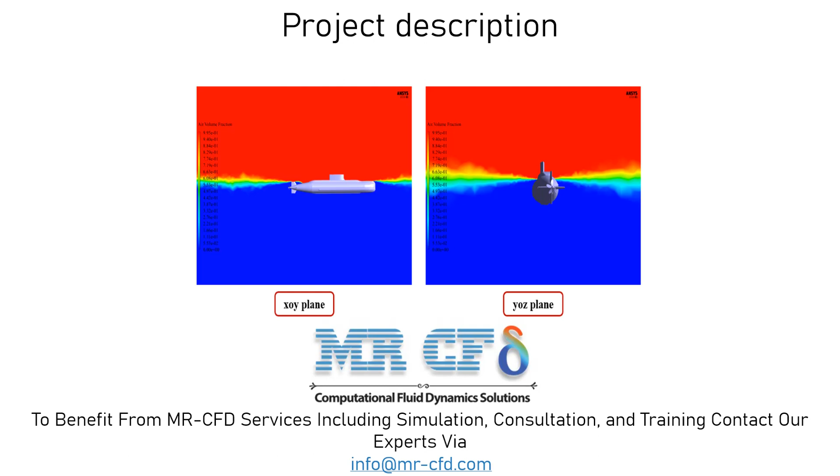In such models, the location of the cells in the grid changes due to the displacement of their adjacent boundaries over time, and therefore, to define the instantaneous grid shift, we benefit from the dynamic mesh model. Also, it should be pointed out that the VOF multiphase flow model is used to simulate two phases of air and water.

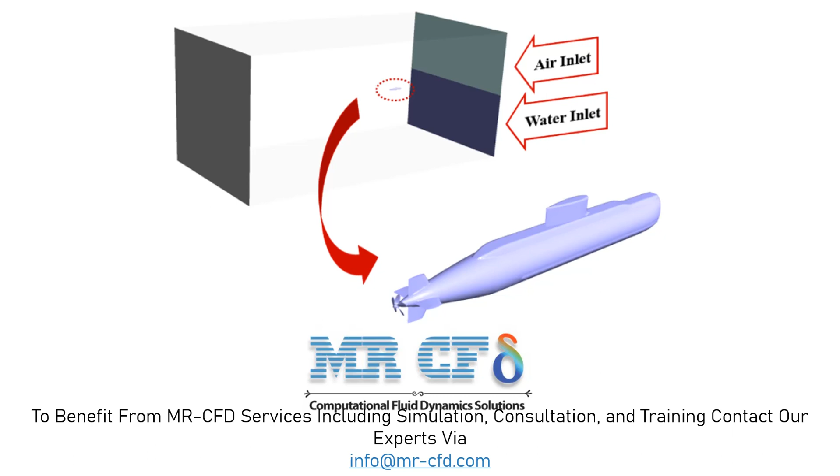The present model is designed in 3 dimensions using AutoCAD, CATIA, and ICEM softwares. The horizontal length of the submarine is 16.25 meters, and at the end of it there is a number of impellers with a diameter of 0.825 meters. Around the submarine, a cylindrical computational area is designed inside a cubic area, the set of which is placed inside a very large cube as a total computational domain.

The meshing of the present model has been done using ICEM software. The mesh type is hybrid, meaning that a combination of a structured and unstructured mesh is used. Thus, meshing in areas close to the submarine hull is unstructured, and in general areas of the model is structured. Also, the element number is equal to 2,802,219.

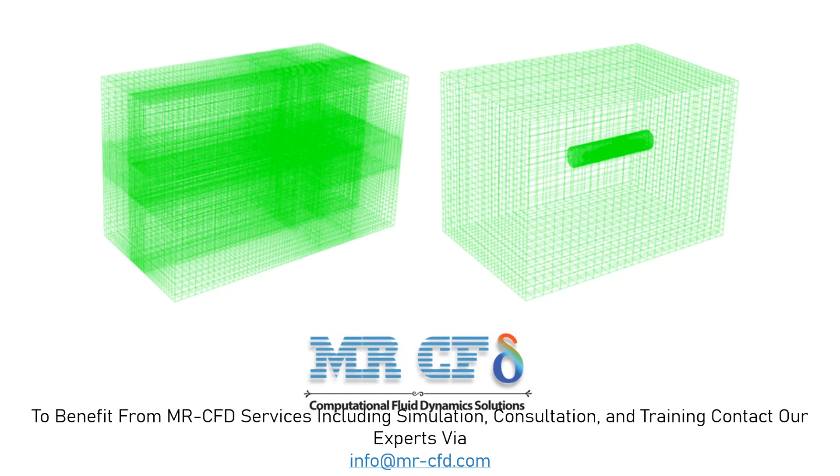Under the General Setup tab, you can see different buttons from scales to units. By clicking on scale, a new window will appear showing you the domain extents of your geometry. Also, under the view length unit section, you can see the default geometry units, which is meter in this project. Also, under the scaling section, under mesh was created in, you can change the settings in order to activate the scaling factors beneath that.

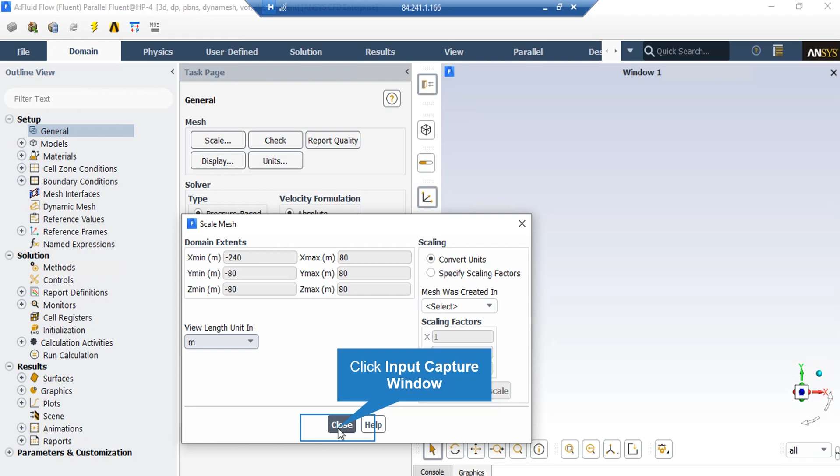For example, your geometry and mesh was designed in a software whose default unit was millimeters. By activating these scaling factors, you can change this factor to your desired factors in order to set the length to the appropriate unit. By clicking on the check button, you will see that under the console tab, the Fluent software will start to check your mesh for any errors.

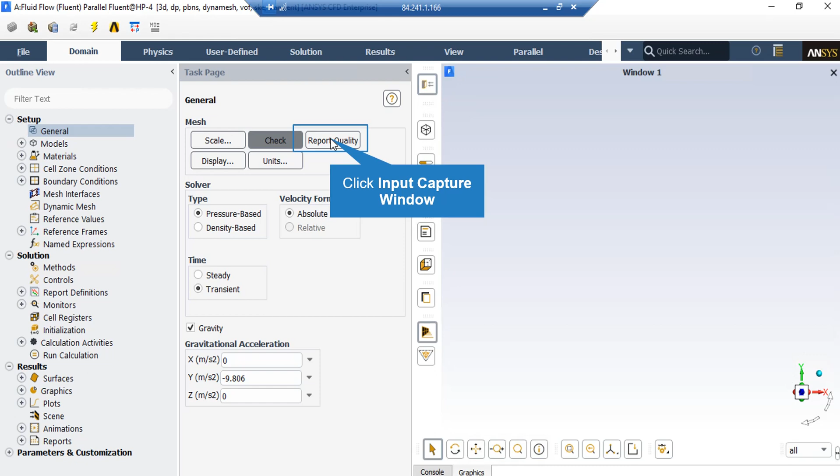Also, by clicking on report quality, again in the console tab, the Fluent software will give you the quality report for your mesh. For example, you can see the maximum aspect ratio of your mesh, minimum orthogonal quality, etc. By clicking on the display button, a new window will appear in which you can see different parts of your geometry. In the window, which shows you the names of the different parts of your geometry, you can select each part and then click on display so that the software will show you that part.

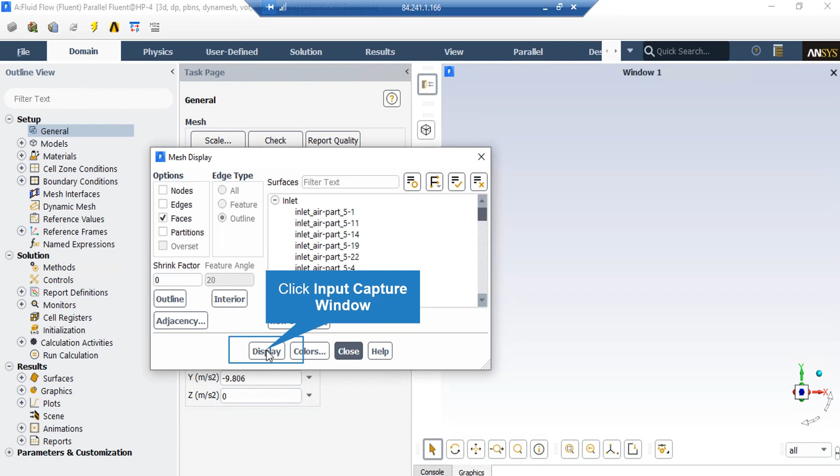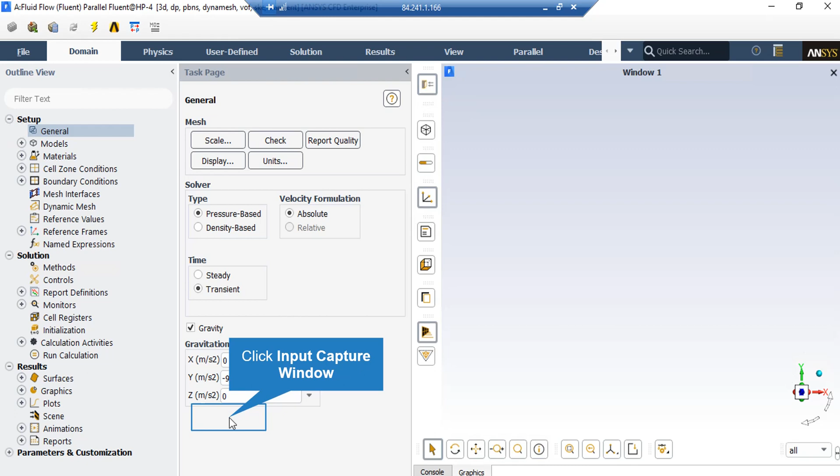Now there are several assumptions taken into account for this project. First, the type of our solver is defined to be pressure based since we are dealing with incompressible flows. Also, the velocity formulation is taken to be in absolute form. And as for the time study, we have selected the transient time study since we are dealing with a time progressing phenomenon. Also, in order to model the buoyancy forces, we have enabled gravity, and its value is equal to minus 9.81 in the y direction.

Now under the model section, if you double click on the multiphase button, in the window you can see that the volume of fluid model is enabled in order to simulate the two phases of air and water. Also under the volume fraction parameter section, you can see that the implicit formulation is selected. Also, as explained about the body forces, we have enabled the implicit body force. As explained in the project description section, we have enabled the open channel flow, and under the number of Eulerian phases, you can see that two phases of air and water are set to be defined and simulated.

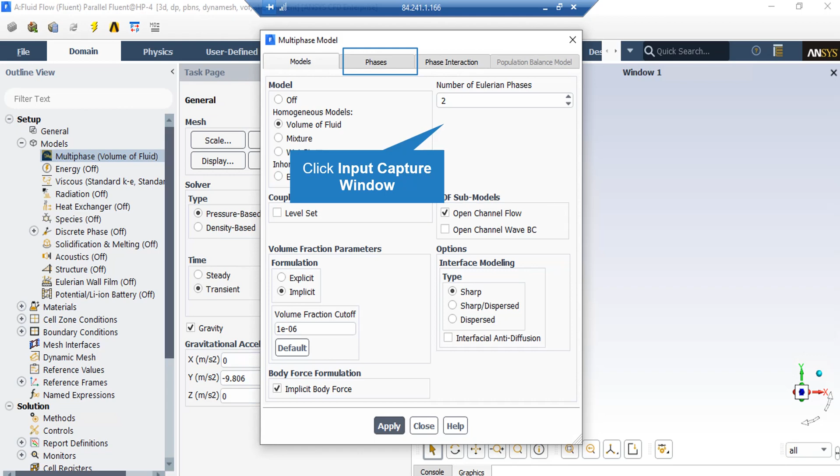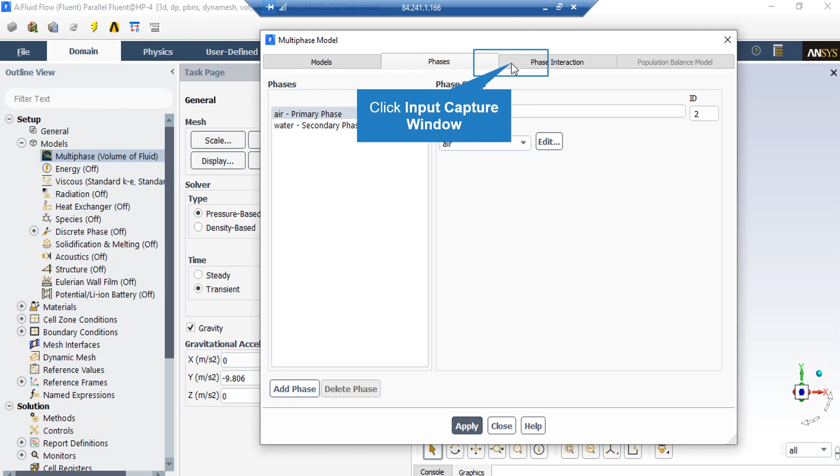If you click on the phases tab, you can see that air and water are defined as primary and secondary phases. In order to add a new phase, you just have to click on the add phase button. But you should be aware that before adding a new phase here, you should add that material in the material section, which will be explained in next slides. Also, click on the phase interaction tab. You can see that the surface tension force modeling between the two phases of air and water is enabled, and the value for the surface tension coefficient between these two phases is set to be equal to 0.072.

After double-clicking on the viscous button, a new window will appear. In the window, you will see that we have chosen the two-equation standard K epsilon model to solve for our fluid flow. The standard K epsilon model is one of the most renowned models for solving turbulent fluid flows, and the two-equation K epsilon model allows the determination of both a turbulent length scale and time scale by solving two separate transport equations.

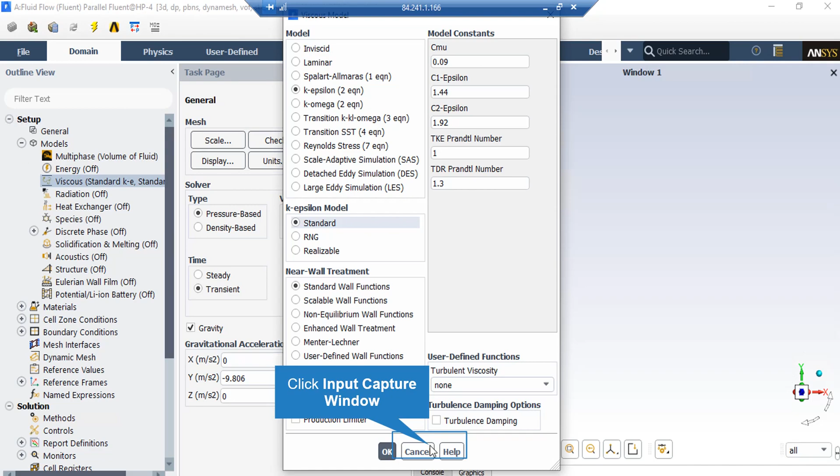If you expand the fluid under the material section, you can see that two materials of air and water are defined here as our two main phases. Also, in order to add a new material, all you have to do is to right-click on fluid and then select new. In the appeared window, you either can define a new material by defining its properties yourself, or you can simply click on Fluent Database and add a new material from the available list of materials from the Fluent software.

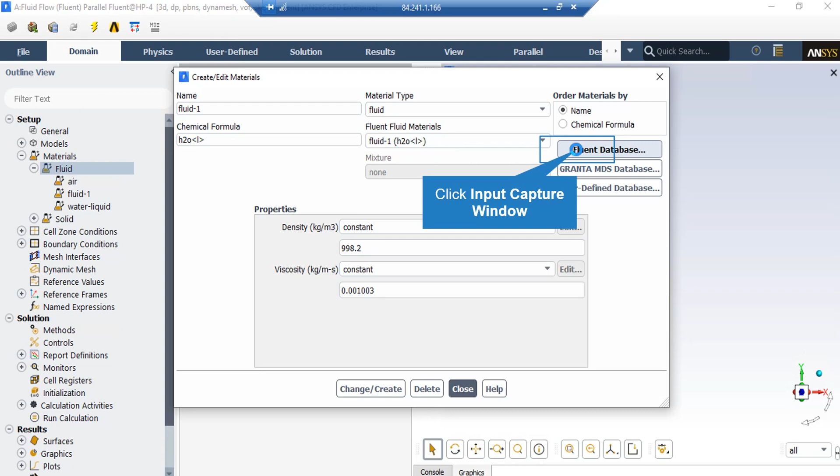Now, in order to correctly model the buoyancy forces applied on the geometry, we need to define the reference pressure location for the software. To do that, we double click on Cell Zone Conditions and we click on the Operating Conditions button.

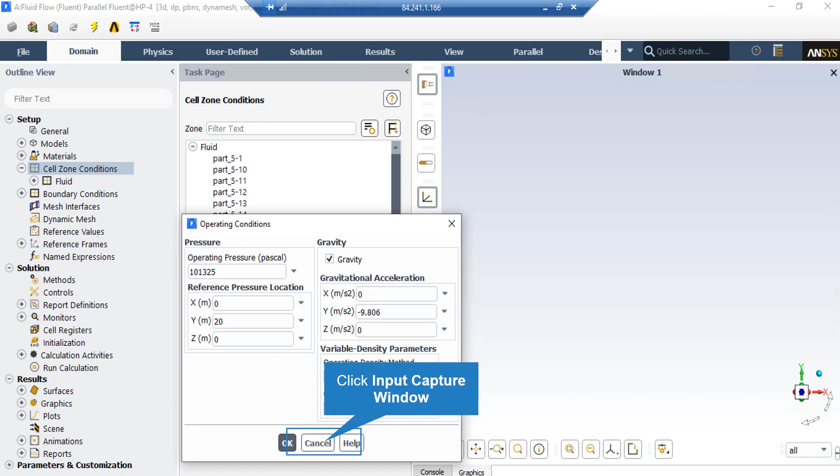Now, if we click on each of these air inlet boundaries, you can see that the type of these boundaries is defined to be velocity inlet. By clicking on the Edit button, a new window will appear in which you can change the settings for these boundaries. In the appeared window, in front of the velocity magnitude section, you have to enter the value of 1.62 meters per second. And under the phase section, if you change from mixture to water, you can see the water volume fraction is set to be 0, which means that only airflow enters this boundary.

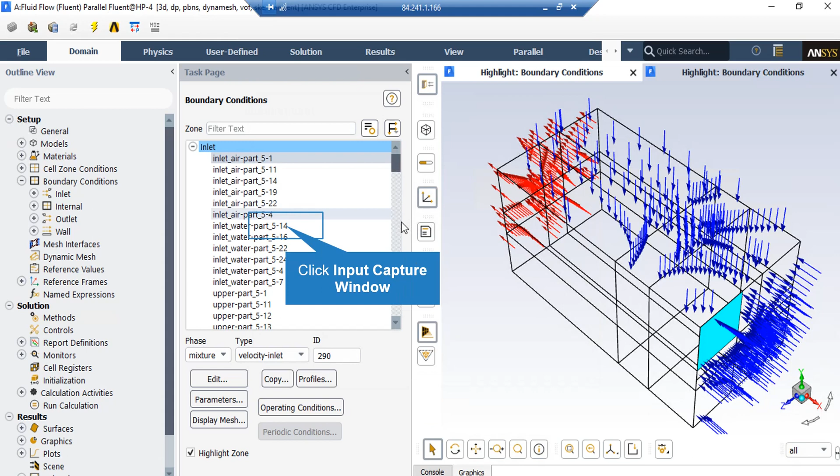And just like the previous boundary, if you click on each of these inlet water boundaries, you can see that again the type of these boundaries is defined to be velocity inlet. By clicking on the Edit button, again you can change the settings for these boundaries. In the appeared window, you can see the same settings as for the air inlet boundary, with the difference that if you click on the phase section and change it from mixture to water, you can see that the water volume fraction is set to be equal to 1, meaning that only water will enter these boundaries.

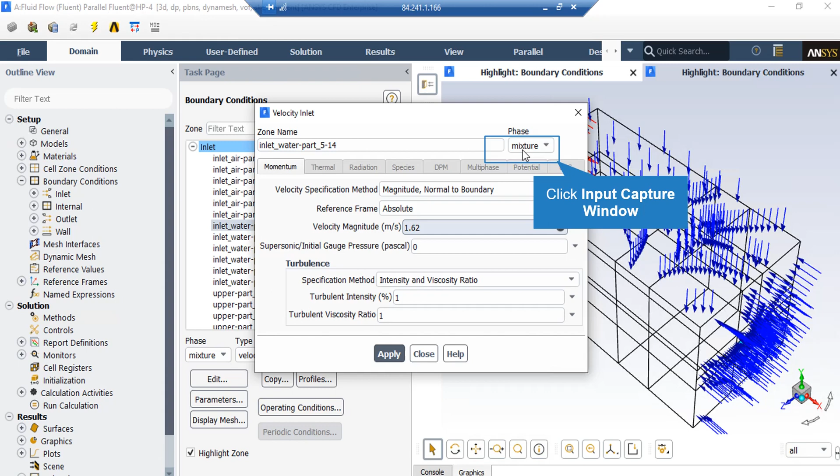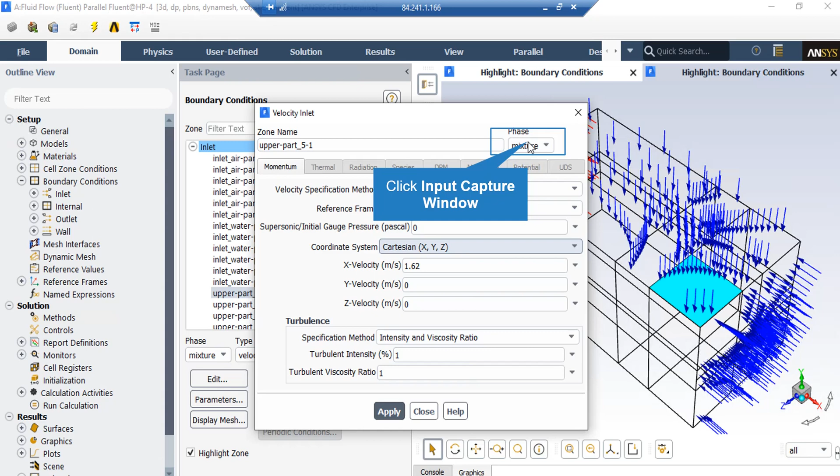And if you click on the upper part boundaries, you can see that under the Momentum tab in the appeared window, in front of the coordinate system, we have selected the Cartesian coordinate, and in front of the X velocity section, we have entered the value of 1.62. Again, if you select the phase section and click on water phase, you can see that the value of water volume fraction over these boundaries is equal to 0, meaning that only air can enter these boundaries.

Now, if you click on the outlet boundaries, you can see that the face related to this boundary is divided into three sections. The upper section is related to the air outlet, and the middle and the lower sections are related to the mixture of air and water outlet. If you click on the outlet boundaries related to the airflow, you can see that under the Momentum tab, the gauge pressure value is set to 0.

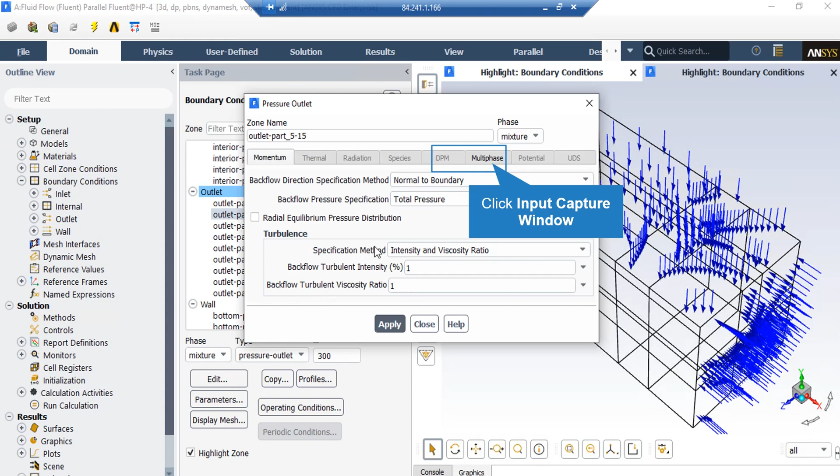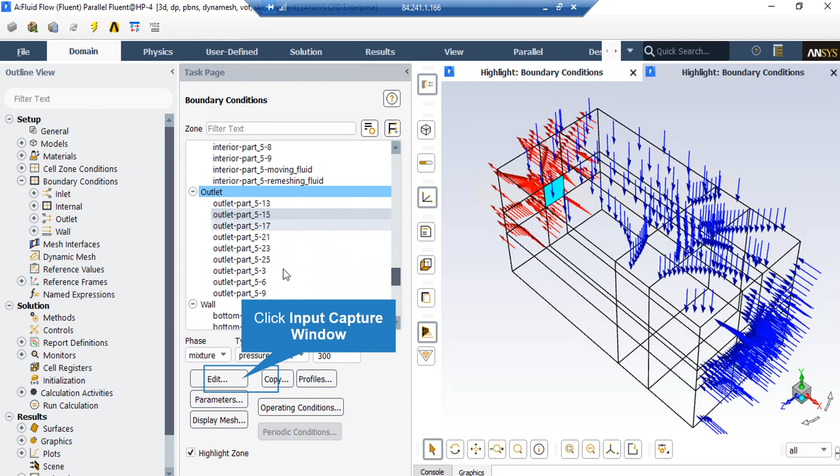Now, if you click on the boundaries which are placed in the middle section and lower section of this face, in the appeared window, if you click on the multiphase tab, you can see that the open channel option is enabled, and free surface level value and bottom level value are entered, as you can see in this slide. The same setting is also applied for the outlet boundary which is placed in the lower section of our outlet face.

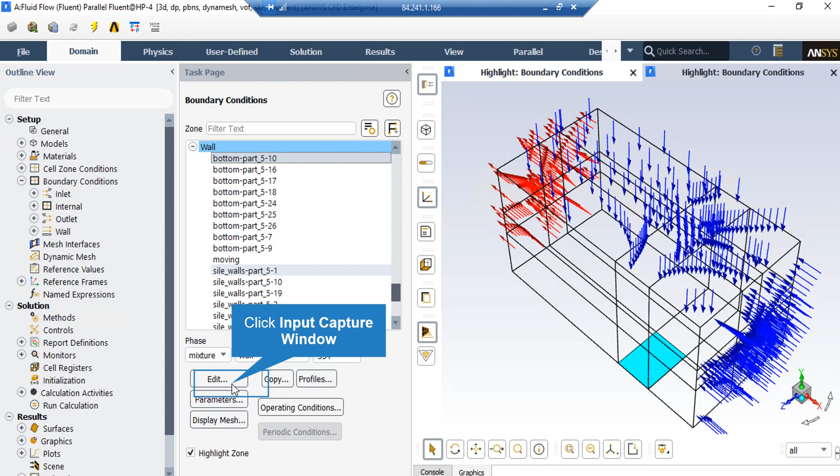And if you click on each of the wall boundaries and then click on the edit button, in the appeared window you can see that the stationary wall motion along with no slip shear condition are defined for these walls.

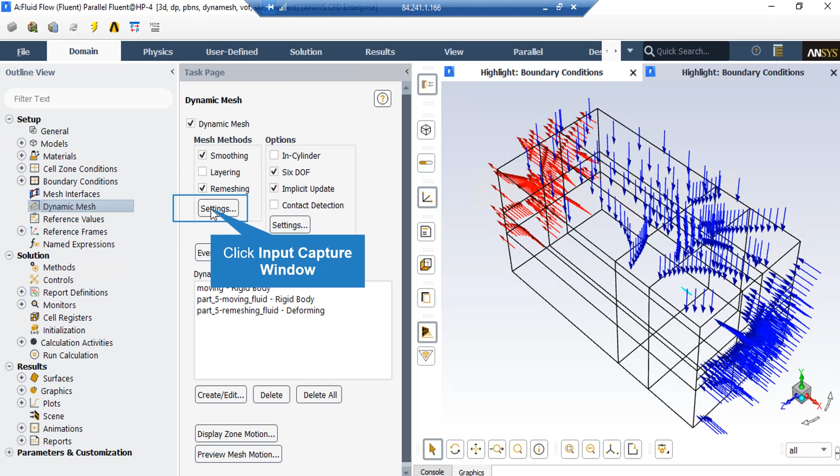Now if you double click on the dynamic mesh button, in the appeared part you can see we have enabled the dynamic mesh option, and under the mesh method we have enabled two options of smoothing and remeshing. By clicking on the settings button, we further adjust these two options. In the appeared window under the method, you can see we have enabled the spring Laplace boundary layer. The spring method is a method in which the mesh cells act just like a spring when they are pushed or pulled by the moving object. Also in this window you can see the specifications for this method.

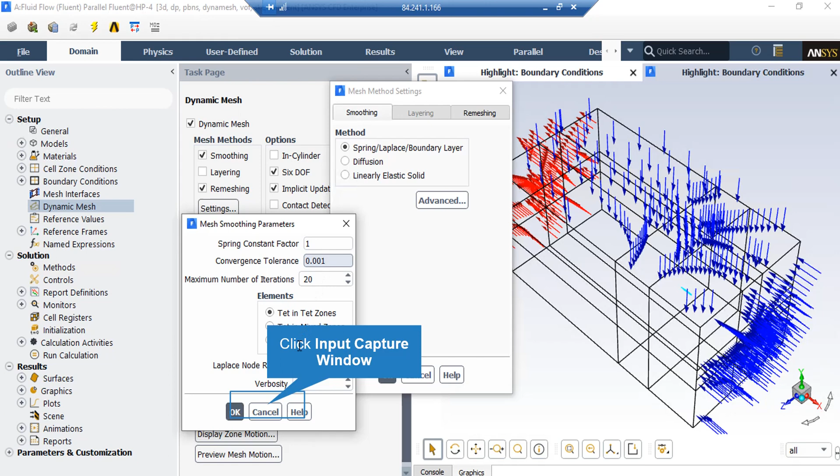Also, if you click on the remeshing tab, you can see that the local cell option is selected, and under the parameters you can see the values which indicate when the remeshing occurs. Setting these values will be explained in the next slide in detail. Under the options, you can see 6DOF and implicit update are enabled. By clicking on the settings button, we can further change and adjust the settings related to these options.

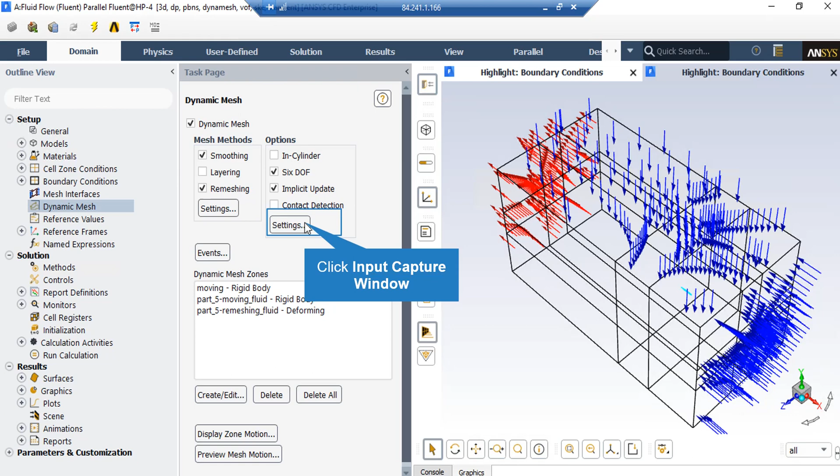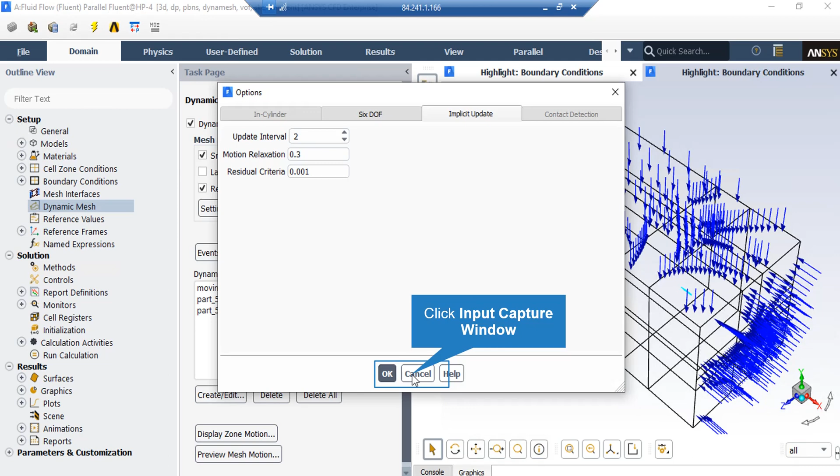In the appeared window under the 6DOF, you can see we have enabled the write motion history, and underneath it you can enter the address where you want to save this file, which gives you the location and the changes in angle of the floating object in terms of time. In this project, since we are calculating the forces that are exerted on the floating object, in order to avoid divergence and in order to map the values of the forces on the new mesh after each remeshing interval, we have enabled the implicit update, and you can see the values for these settings in this window. Now, in order to set the settings for dynamic mesh for different zones, we click on the create or edit button.

In the appeared window, if you click on the moving mesh zone, you can see that the type of this zone is defined as rigid body. Also under the motion attributes tab, you can see that under the 6DOF UDF or properties, a UDF is defined, and under the 6DOF section you can see we have enabled this option. Also under the center of gravity location, we have calculated the center of gravity of our submarine using the SolidWorks

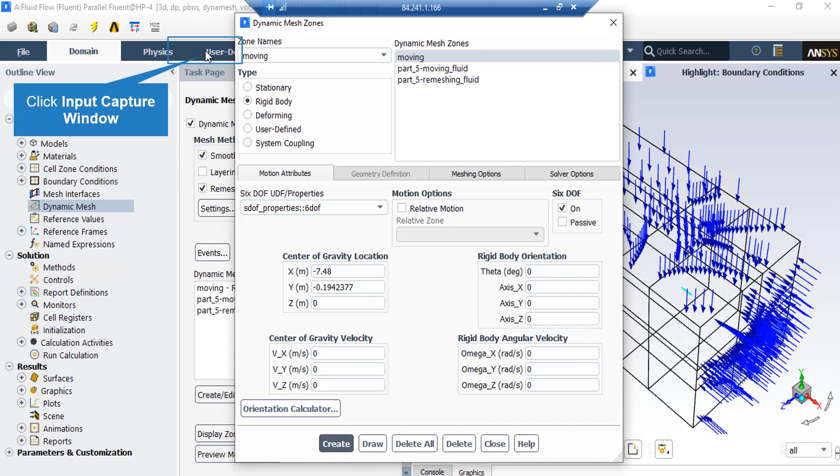software. Now in order to introduce and compile the UDF for the software, all you have to do is to click on the user defined tab and then go over functions and select compiled. After clicking on the compile button, in the appeared window, by clicking on the add button, you can select the UDF file which will be given to you with the rest of the files, and then by clicking on build and then load, this UDF will be loaded for the software.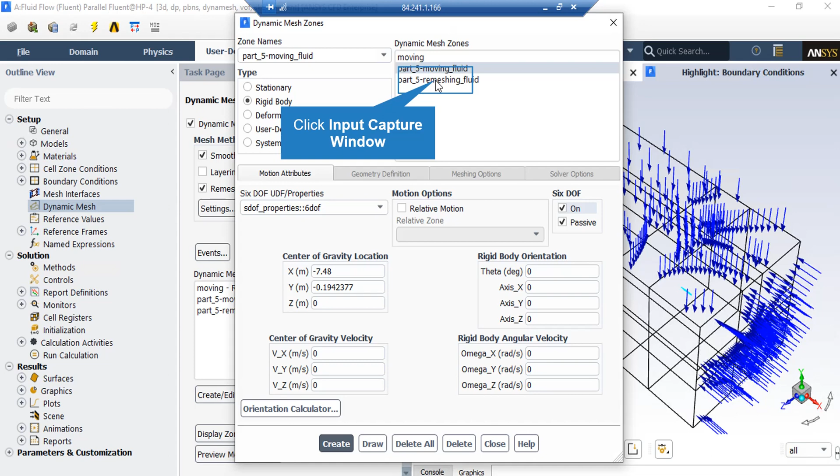If you click on the moving mesh zone, you can see that the type of this zone is defined to be rigid body, and under the motion attributes tab you can see we have applied the UDF to this zone too. Also, the center of gravity location is as you can see in this window, and under the 6DOF section you can see we have enabled this option, and we have also enabled the passive mode too.

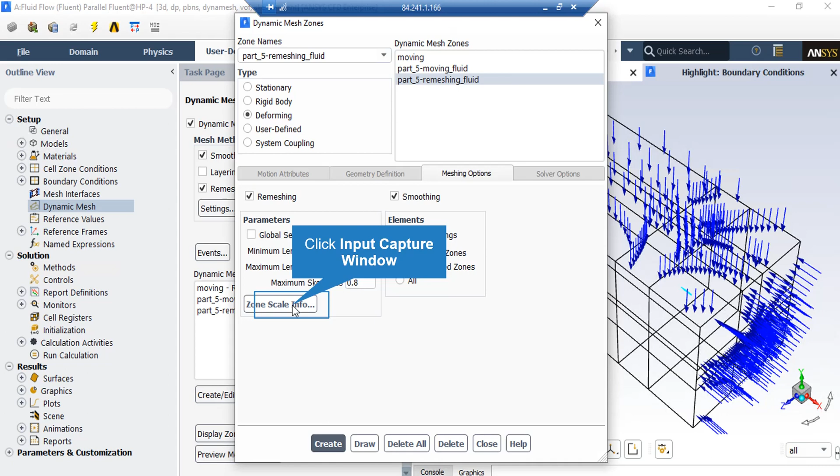Now if you click the deforming mesh zone, you can see that under the meshing option tab, the remeshing and the smoothing options are defined for this zone. Also, if you can remember, in the previous slide we talked about the parameters that stipulate the remeshing process. You can see the same parameters here. By clicking on zone scale info, we will explain how to define these values correctly.

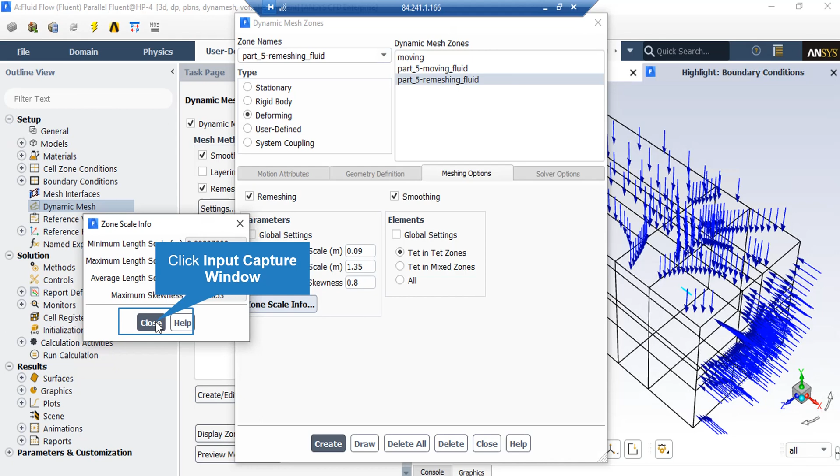In the appeared window, you can see the quality info for the manually generated mesh at the first place. Now we want the new mesh after the remeshing interval to almost have the same quality as the first mesh. So we enter the values under the parameters section as near as possible to the info which is shown in the zone scale info window. We also enter the same values in the mesh method setting window under the remeshing tab.

After double-clicking on the method, you will see that a new window will appear showing you the pressure-velocity coupling. Also, you can see that the spatial discretization methods are shown in this window. You can change this discretization into other formats, like first-order upwind and the other options available for each variable under their combo list.

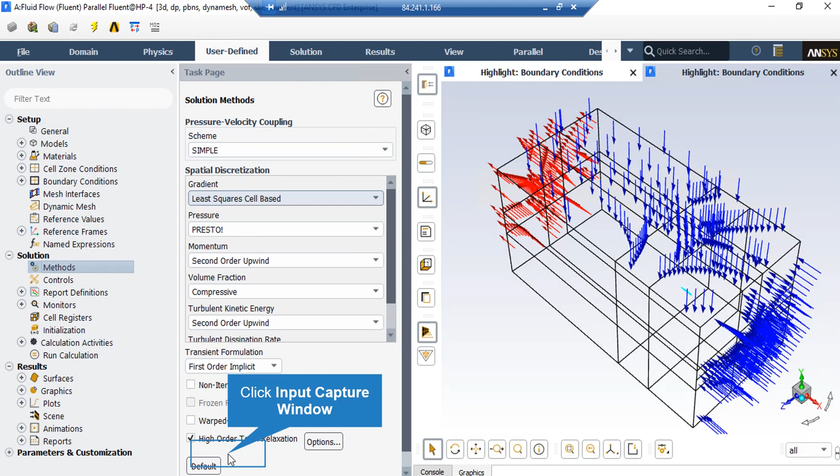And for the SIMPLE pressure-velocity coupling, the SIMPLE algorithm is kind of an iterative solver which uses a relationship between velocity and pressure corrections to enforce mass conservation and to obtain the pressure field. In the solution control section, we change the values of under-relaxation factors for parameters like momentum, turbulent kinetic energy, or turbulent dissipation rate in order to avoid divergence and to increase the accuracy of our solution.

There are two ways to check that your simulation process has reached convergence. Alongside checking the residuals nearing zero, you may define some report to make sure that an equation has reached convergence. For example, by just right-clicking on the report definition and going to new, you are able to choose between different reports.

For example, you can define a mass flow rate report on an arbitrary boundary based on your geometry and your simulation. You are able to see whether this mass flow has reached a constant value or not. If yes, it may be a sign that your simulation has reached convergence, but the residuals must be checked as well.

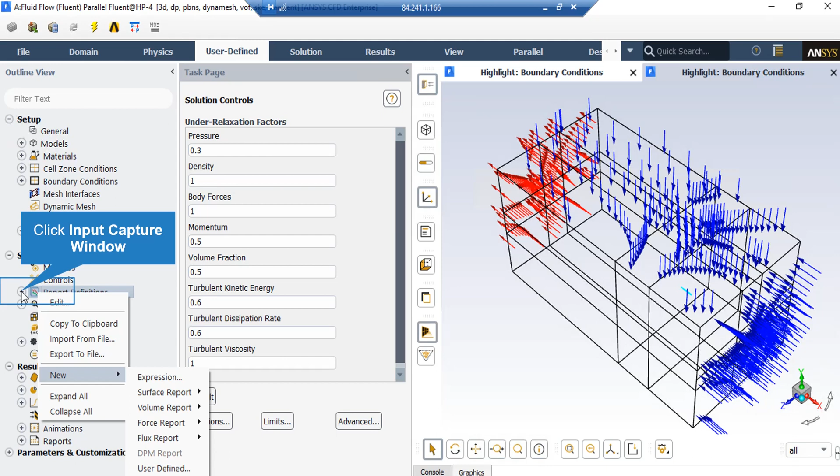If you expand the report definition section, you can see that a report is defined here. If you double click on it, in the appeared window, you can see that this report is defined to calculate the drag coefficient over the surface of our submarine. Under the force vector section, the value for x is defined as 1 since the drag force is applied on the submarine in the x direction. Also under the wall zones, we have selected the moving, which represents the surface of our submarine.

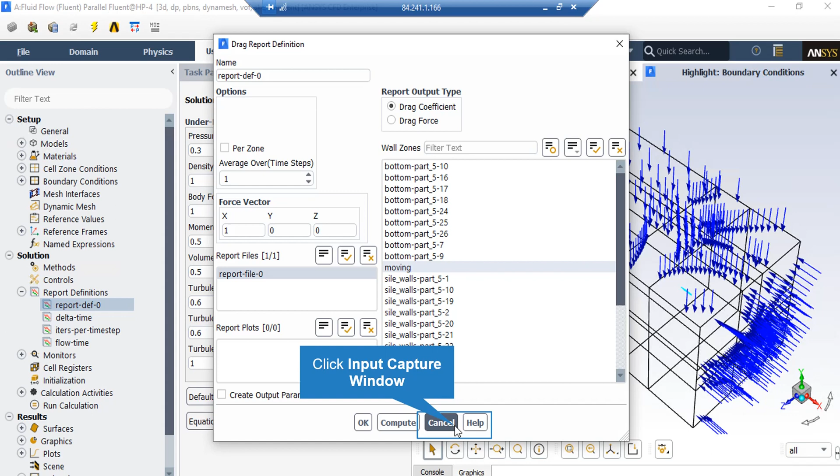After double-clicking on the Residuals button, a new window will appear. In the appeared window, you can see the absolute criteria for equations like continuity, x velocity, y velocity, and so on. Now, when you set the software to start the simulation, there would be an error between each iteration. If that error is less than these criteria, it means that that equation has reached convergence.

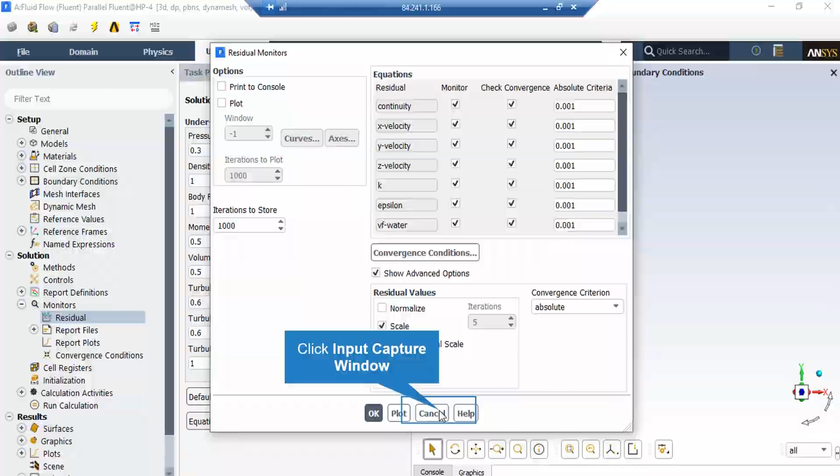After double-clicking on the initialization button, a new window will appear showing you different methods of initialization, hybrid and standard. Now in the standard initialization method, you get to choose the first amounts and values for the first iteration of the simulation progress. These values refer to the values used in the first iteration of the simulation progress, and if you choose the values for each parameter wisely, your simulation progress will finish sooner.

It should be mentioned that you can also choose the first values or the initial values by just clicking on the compute from drop-down list and clicking on one boundary. For example, by clicking on compute from all zones, the software will automatically average the values in different zones and boundaries and put those values in the initial values for the software.

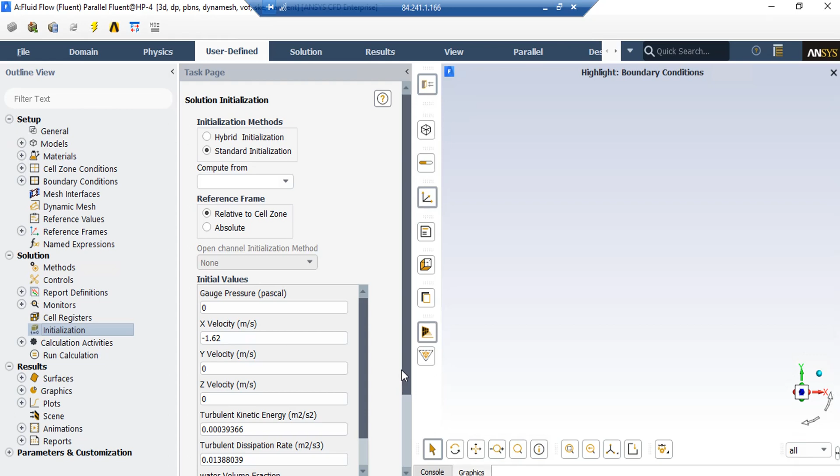Now in this slide you can see that the water volume fraction in the domain is equal to 1, which means that we have water in our whole domain without any air. Now to make the software understand that half of our domain is filled with air, we have to patch this information. But before patching, we click on domain and then go over Adapt.

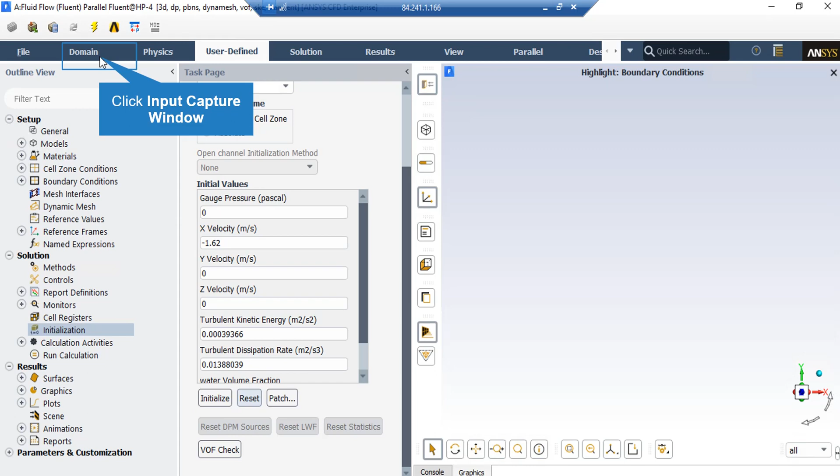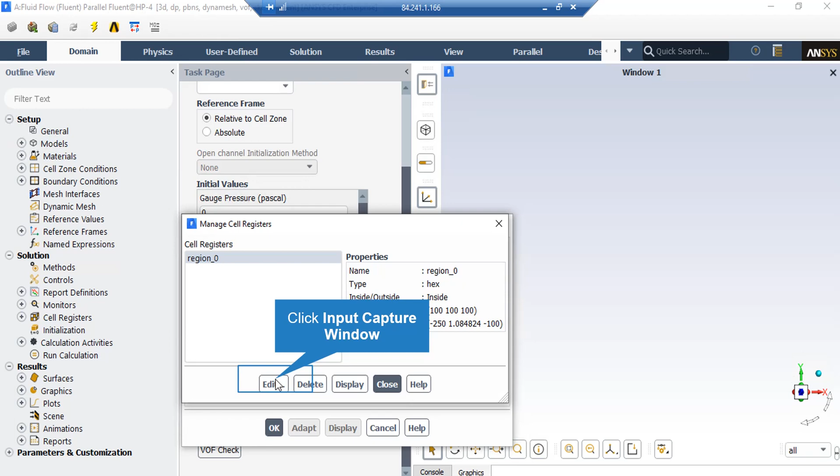In this part, we will define the separation line or the interface between two phases of air and water in our domain. To do that, we click on Adapt and then go over Refine or Coarsen. In the appeared window, you have to click on Cell Registers and then click on New. Since we had previously defined this region, we click on Manage to show the settings related to this separation line. After you selected New, a window like this will be shown to you.

In this window, under the shapes, you will have to select the hex, and under the input coordinates, you have to enter the values as you can see in this window. And then click on Save button. Now after defining this separation region, you have to click on Patch button.

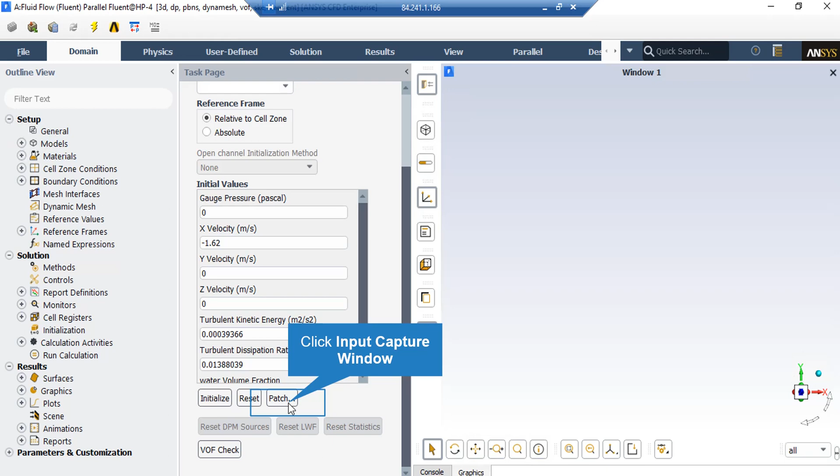Under the phase, we select the water phase, and underneath it, we select the volume fraction variable, and we set this variable to be equal to 0. And under the registers to patch, we select the region 0 which we had previously defined in previous slides. After that, we click on Patch button.

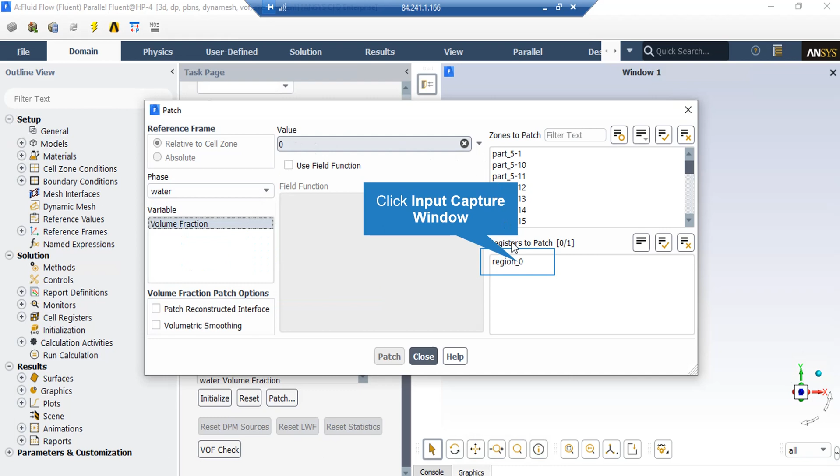After the process of patching, we double click on Run Calculations button, and in the appeared window, under the parameters, we enter the values of number of time steps, time step size and max iterations per time step as you can see in this slide. After that, we click on Calculate button and the software will start the simulation process.

It should only be pointed out that if you face divergence, try to first disable the dynamic mesh option, then start the simulation process and run the problem for 1 or 2 iterations. After that, you can stop the simulation process, enable the dynamic mesh option and then continue your simulation process.

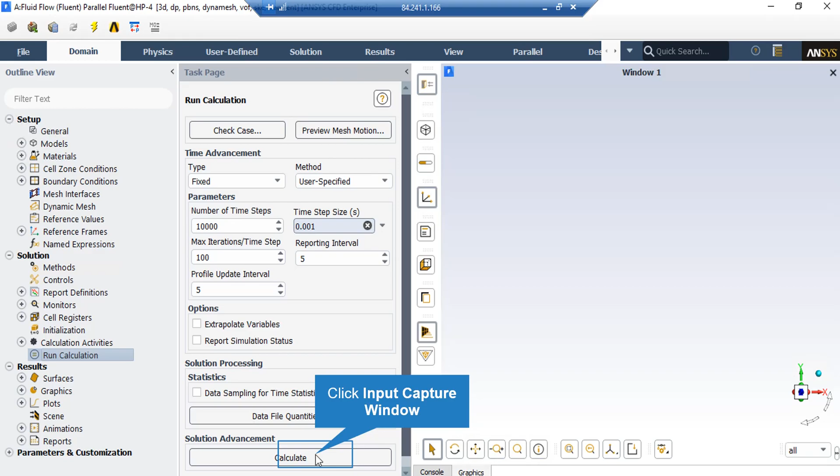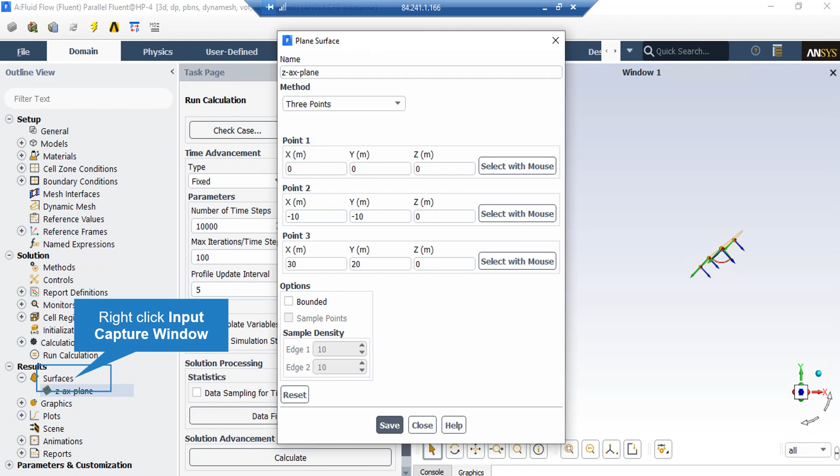In order to extract 2D contours, we first have to define a plane. To do that, we right click on Surfaces, then go over New and then select Plane. In the appeared window, under the method, we select 3 points and we enter the needed values as you can see in this window.

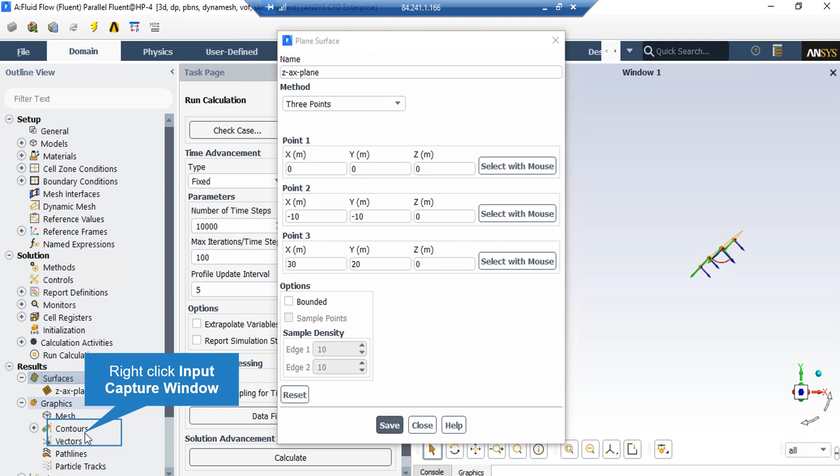Now that we have created our plane, in order to extract the 2D contour, we have to expand the graphics section, go over contours, right click on it and then select New. In the appeared window, in order to extract the volume fraction contour of the two phases of air and water, under the contours of section you have to select phases, and under the phase section, for example, select air phase. After that, under the surfaces section, we have to select our defined plane and then click on Save or Display button.

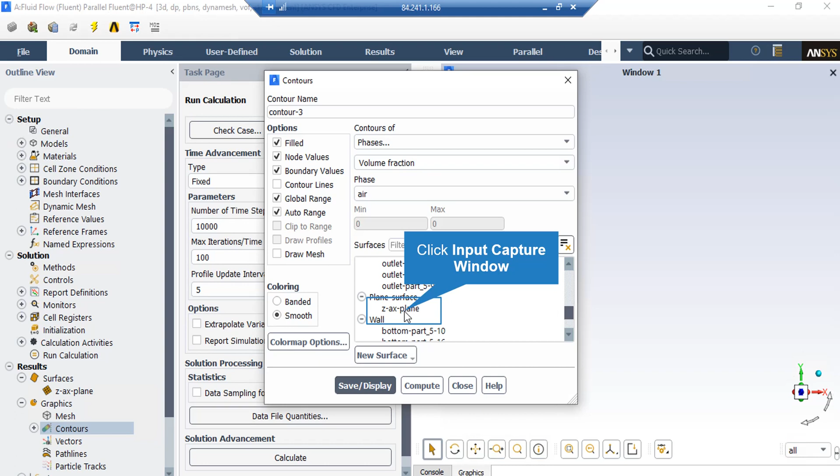In this contour, you can easily see the free surface of water and that the object is floating on the interface between two phases of air and water. In order to extract the velocity contour over this plane, all you have to do is change the contours of section from phases to velocity. After that, just by clicking on Save or Display button, the software will show you this contour.

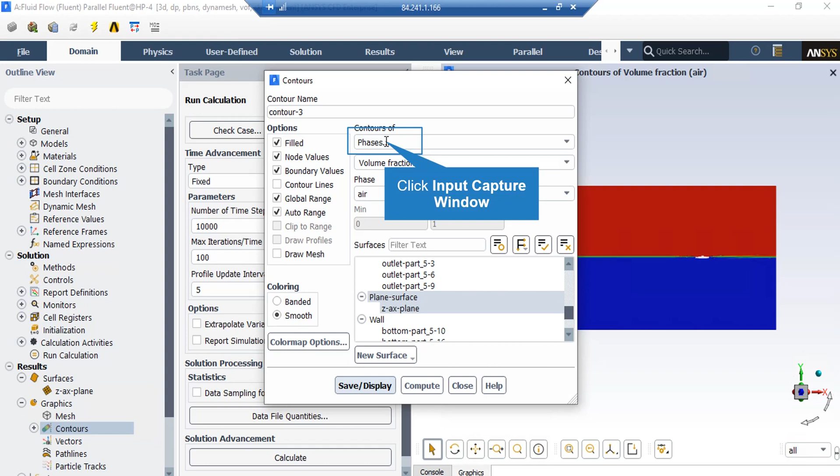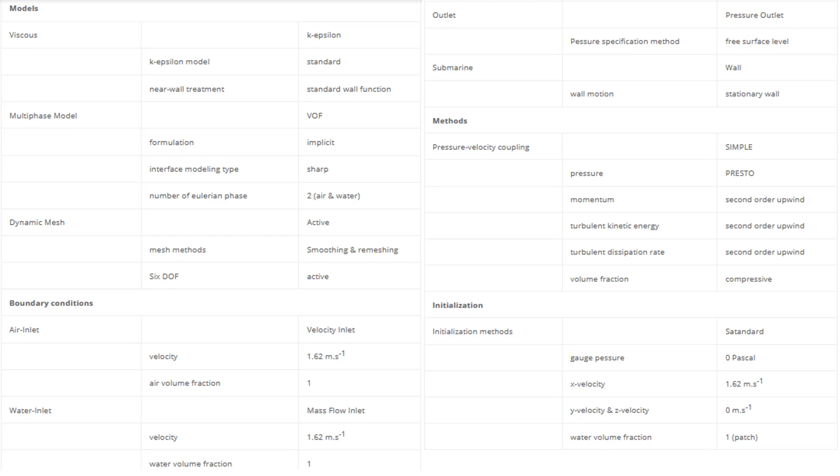Now in this contour, you can easily see the changes in velocity of the air and water after they pass over the floating object. Finally, a summary of different settings and setup that we have used in our project is presented to you in the slide.